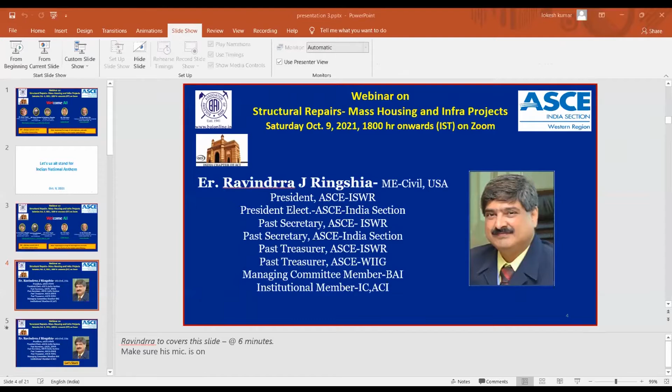So this is the issue, it's not coming on full screen. Theek hai, okay, go to the view option on the top, slideshow ke baaju mein. Okay, not a problem, we'll carry on. Not a problem, let it be. Lokesh, let it be, don't worry. It's an IT problem, not a civil engineering problem.

So, fine, it's my pleasure to welcome again our chief guest, Mr. R.N. Gupta, President BAI, and our today's expert speaker, Dr. Ehsani.

Dr. Ehsani, Centennial Professor Emeritus of Civil Engineering, University of Arizona, USA, and President of QuakeWrap Inc. And Dr. Ilyas, Director Region 10, ASCE from UAE, and Dr. Kamal, Governor Region 10, ASCE from Sri Lanka.

Mr. Deepak from High Speed Rail Corporation, Mr. Rajendra Pawar, Past Secretary WRD Maharashtra, Mr. Tilak Raj Kapoor, Past Secretary Water Resource Department MP, Mr. Carlos from Mexico, Mr. Yashpal Mehta from Delhi Metro Rail Corporation, dignitaries from Water Resource Department from Maharashtra and MP, dignitaries from Sardar Sarovar Narmada Nigam, and dignitaries from Pan India and all over the world, students and my dear friends.

Thank you very much. Thank you, Mr. Shri, and thank you so much. It's great to be with you. Thanks to all of the distinguished guests, and I'm happy to participate in your seminar today. Let me start by sharing my screen. So hopefully everyone can see my screen now. Yes, sir. All right, very good. Well, again, thank you. I know I have a limited time, so let me just jump into the presentation and get going with this.

Okay, so in my talk today, I'll start with a little bit of introduction about FRP and how these materials work from an engineering sense. This is really the result of nearly four decades of my work, so to summarize it in 30 minutes, I hope you can appreciate that I'm not going to be able to cover everything in depth, but I'll give you a flavor of some of the things. I'll basically talk about beams, slabs, and column strengthening, and towards the end, some new products we've developed for marine infrastructure or steel columns, and then sandwich construction.

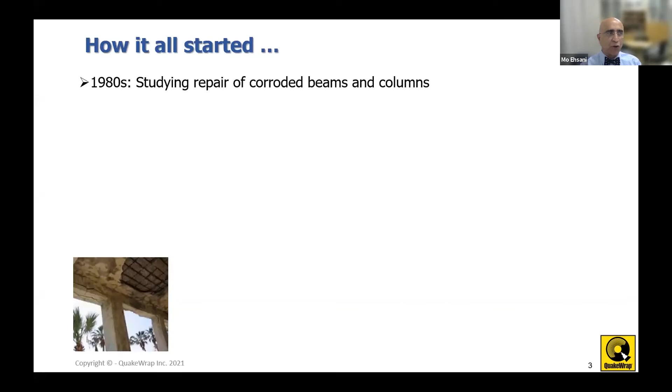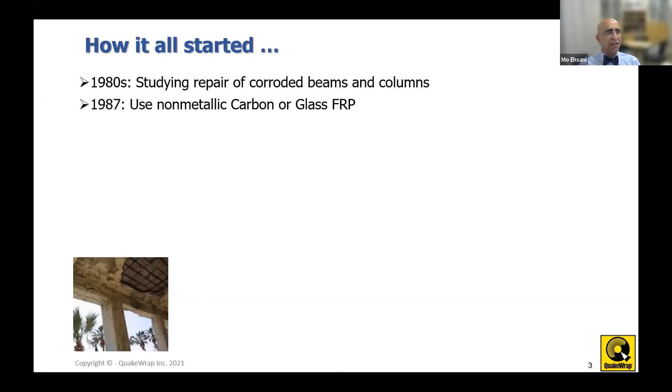So this whole thing really got started in the 80s when I was looking, in the beginning of my career, at some new solutions for infrastructure repair, because as you know, most of the problem is with the corrosion of steel. So we were looking for a non-metallic solution, and that's why we started looking at carbon or glass FRP, and I'll explain these in more detail. But at the time, carbon was being primarily used for military applications, so it was really expensive and didn't make sense for use in the construction industry.

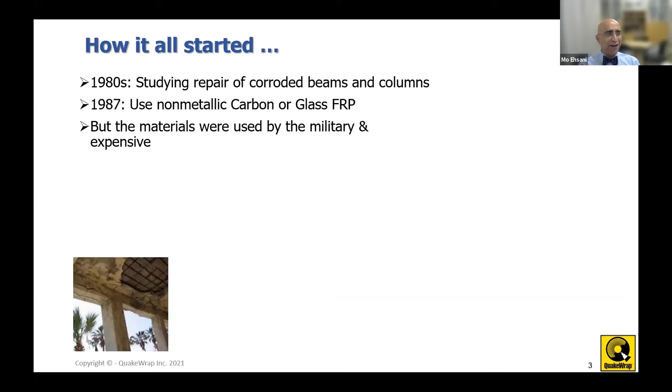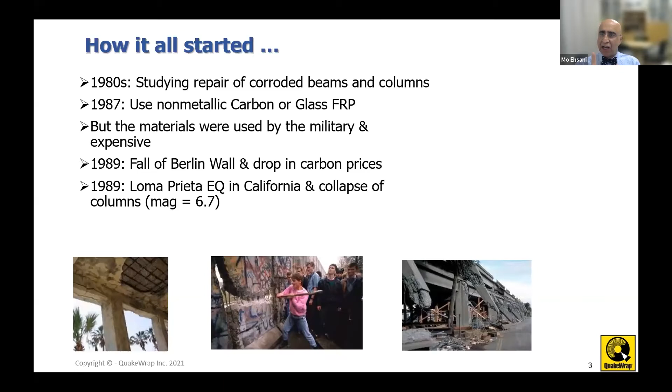But for those of you who are a little more senior, age-wise, you can recall that at the end of the 80s there was the end of the Cold War and the collapse of the Berlin Wall, and as a result the military's need for these materials dropped, and consequently the price went down. About the same time, there was the major 1989 Loma Prieta earthquake in California, where many of the columns in bridges and buildings failed because they had enough longitudinal steel but not enough ties to confine these columns. So everything was kind of falling into place.

And so at that time, we started developing this company, QuakeWrap. In fact, the name QuakeWrap came from that first application, wrapping fibers of carbon around the column to make it earthquake resistant. So that's how we got the beginning, or the start, of our company.

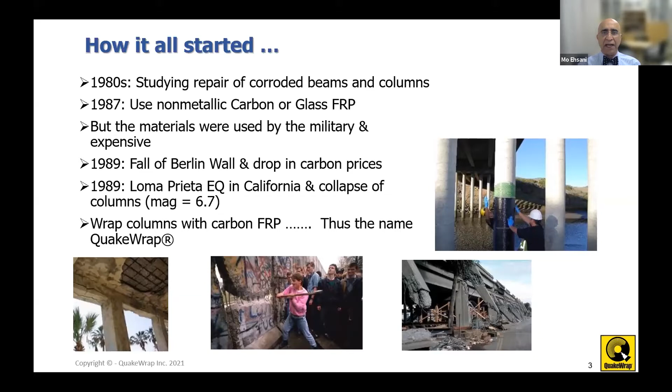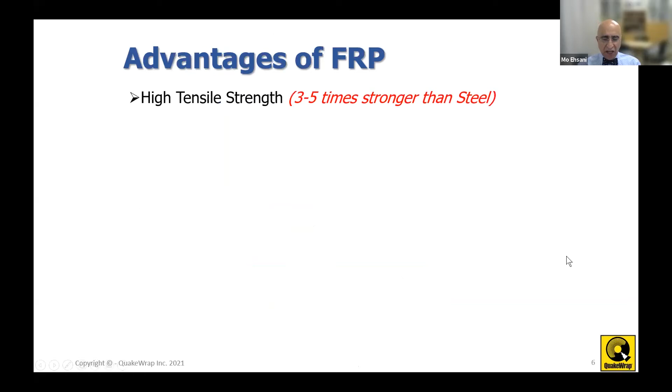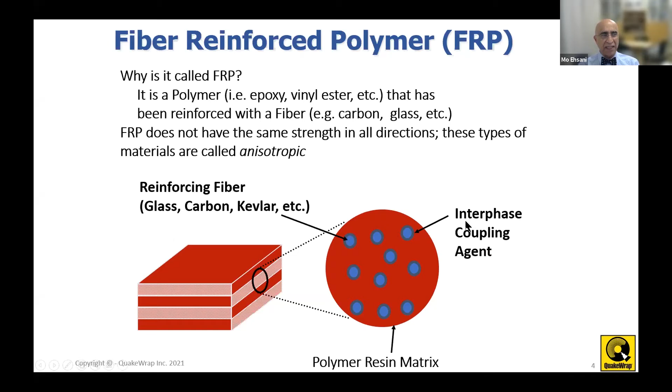Now, one thing that's very different about FRP compared to other materials is that unlike other engineering materials that are isotropic, these FRP products are anisotropic. So their strength comes from the orientation of the fiber. That's really something to keep in mind - it's the fiber that gives the strength, and that can be a very useful attribute of these products.

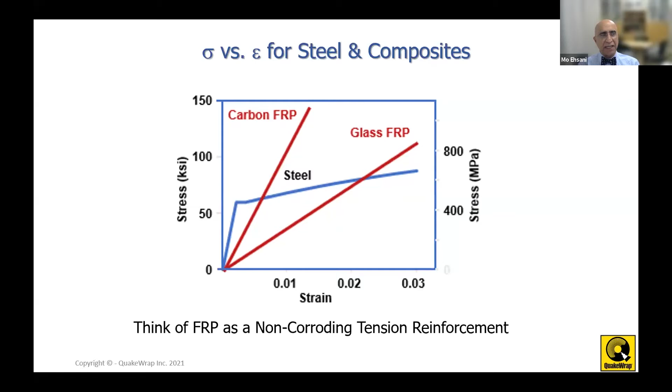In terms of their strength, unlike steel, which we're familiar with, that goes through a yield plateau and maintains that strength, FRP products all act linearly elastic to failure. So here we have carbon FRP or glass FRP, and as you see, both of their breaking strengths are higher than steel, but they work linearly elastic to failure. So that's something to keep in mind. But as I'll show you in some of these applications, really keep in mind these are just like any type of tension reinforcement that you use, except that they don't corrode. That's the main advantage of it.

I'm not sure why - if somebody else is controlling this, I hope they're not. I can control the thing on my own here.

So the advantages are listed here. We have high tensile strength, about 3 to 5 times that of steel, lightweight - if you're strengthening a building, you usually don't need any foundation adjustment. They are, as I said, corrosion resistant, with excellent chemical protection, and they are waterproof, of course. Construction goes really fast, and they are versatile, in that they can be applied to any type of cross section, taking that shape.

These are some of our particular product attributes - they are safe for the environment, so we have no VOC, or volatile organic compounds. They're 100% solid, and our products are also odorless, and we have certification for repair of potable water pipes and tanks. So in general, these FRP solutions offer a low-cost alternative with a good return on investment for many of these projects.

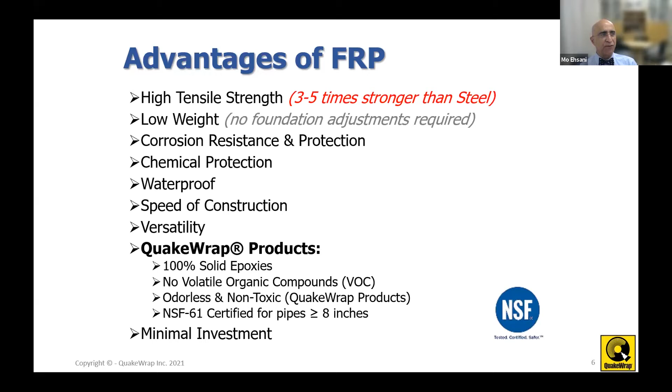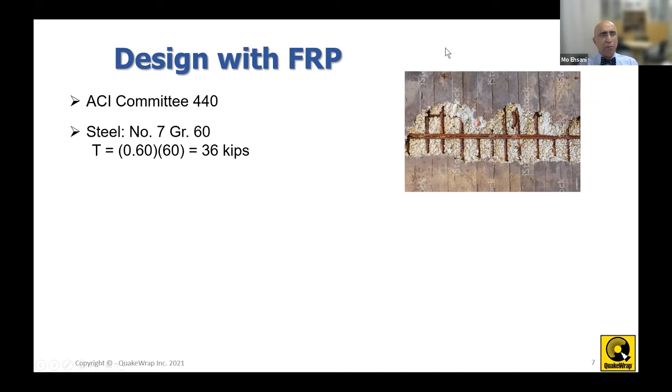So I thought, as an example, if you really want to grasp this concept - of course there have been codes developed recently, the ACI Committee 440 now has documents that help with the design of these - but let's just say you're looking at a typical concrete wall, for example, which has some number 7 rebar. Number 7 is basically about 22 millimeters in diameter, at a certain spacing. And that number 7 rebar has a force of about 36,000 pounds.

And if you put a layer of this carbon fabric on the surface of the same wall, this particular fabric has all of the carbon fibers oriented in the direction of that green arrow. So if you took 1 inch or 25 millimeters of this and tested it, it breaks at about 6,000 pounds every inch.

So really the comparison is that 6 inches of this fabric gives you the same force as one of those reinforcing bars. Basically, if you cover your wall with this layer of carbon fabric, it has the same strength as putting number 7 rebars in your structure.

And as you can appreciate, this is very thin and goes on very easily, so construction is really easy. And then, of course, you have an impervious layer on top of your structure that prevents it from corrosion.

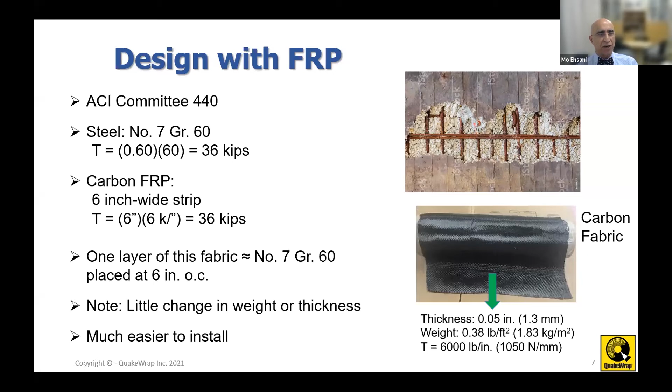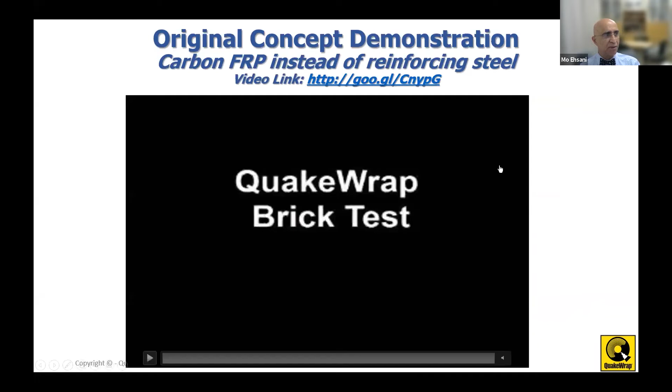I thought this video might give you a good idea of how the original system that we developed works. Here I have a series of bricks put on a table. They are not even connected or bonded together. Let's show this video, and hopefully nobody is touching this so the video will play.

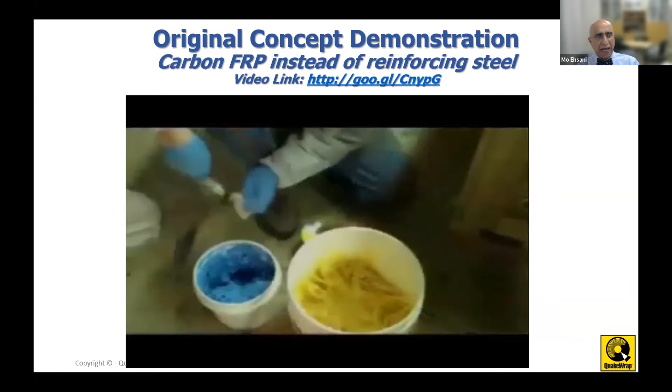So we can take this carbon fabric, which is the reinforcement. You see, you can cut it with scissors easily. Then we mix this epoxy paste material.

I'm not sure why this is doing it. Okay, I guess we won't show you the video. Something is technically going wrong.

But these FRP products are best for tension reinforcement. And again, realize that in concrete structures, shear is also resisted as diagonal tension, so they work with that.

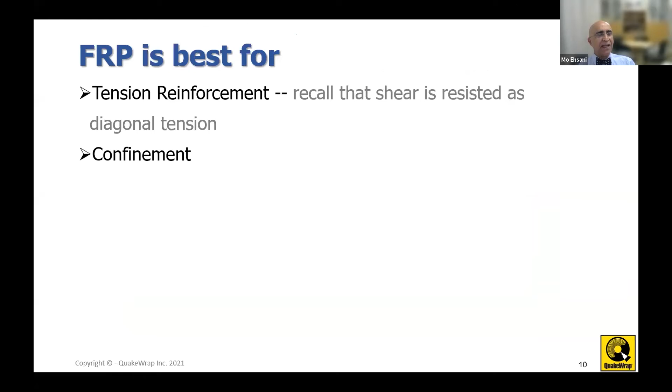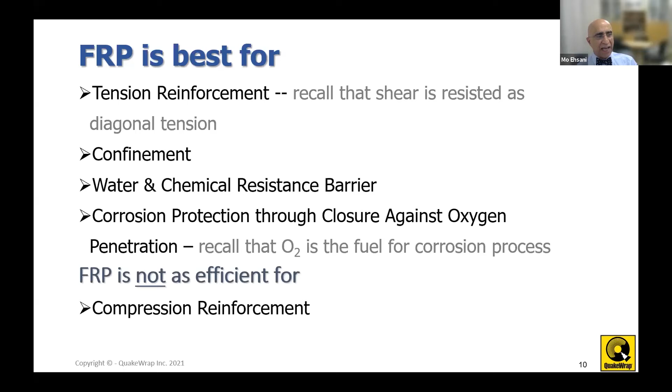They're excellent for confinement, and as a water and chemical resistant barrier. Remember that for corrosion to take place, you need oxygen present. If you wrap your structure with a layer of FRP that doesn't allow oxygen or moisture to penetrate, this would definitely help stop the flow of oxygen and bring the corrosion rate down to very low levels.

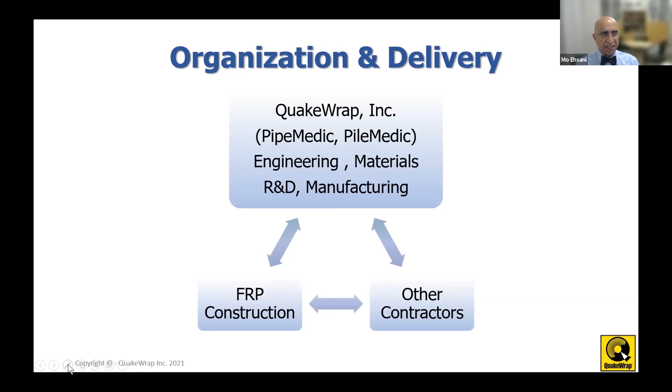And sometimes our company and other contractors team up as a subcontractor arrangement. So there are various ways of delivering these systems.

In this slide, because of the shortage of time, I thought I would at least show you all the different types of applications these materials can be used in, and hopefully I'll get to cover some of them in more detail.

So the first building you see on the upper left was an 8-story building in Miami, Florida, and they wanted to build 2 more floors on top of that. The columns in the lower 8 floors, there were 180 columns, and we strengthened those columns so they could carry the weight of the additional floors.

The pipe that you see here is a penstock for a hydroelectric project in Costa Rica, 1.75 kilometers of a 2.1 meter diameter pipe that was built on site. When they tried to turn it on, they realized there were millions of holes in this pipe and it was leaking. So we fixed that in 3 weeks and received a couple of international awards for that project.

That bridge you see shows that sometimes even construction errors could be a good candidate for these repairs. This was a brand new bridge that was being built in New Mexico.

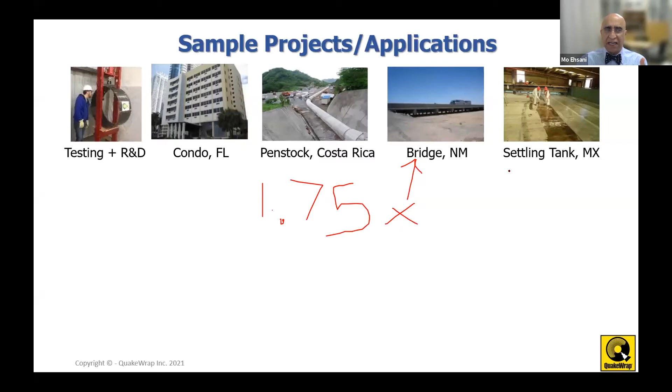The next project is in the mining industry, a settling tank in Mexico where they hold sulfuric acid in these mines. It's a very corrosive environment, and we can strengthen those tanks by lining them. Another example is for the United Nations, a few years ago when they built a new headquarters in Beirut, Lebanon, we provided blast retrofit for that building before they moved in.

Many projects involve historic buildings and preservation. In India, you have a lot of historic buildings with your rich culture, and these solutions are ideal because they can be used without changing the historic nature of those structures. Here you see the Los Angeles County Museum of Natural History. That other 14-story building in the middle was damaged in an earthquake in Alaska, and because of the high cost of repair, it was left abandoned for 20 years. But with these solutions, it was fixed and again received an international award.

We make pipes out of these products in different shapes and sizes. These pipes can be made very close to the job site, which is the main advantage, so you don't have to pay a lot for transporting them. In this project in Australia, our office there is repairing a culvert under a roadway with pipes built in our office in Brisbane.

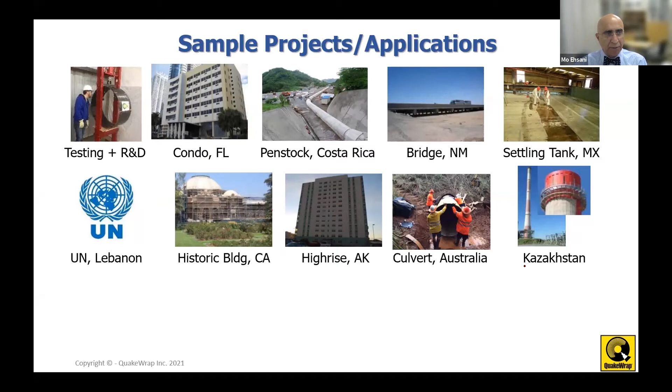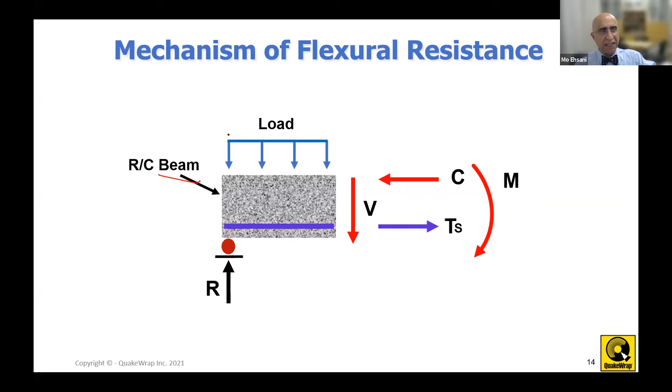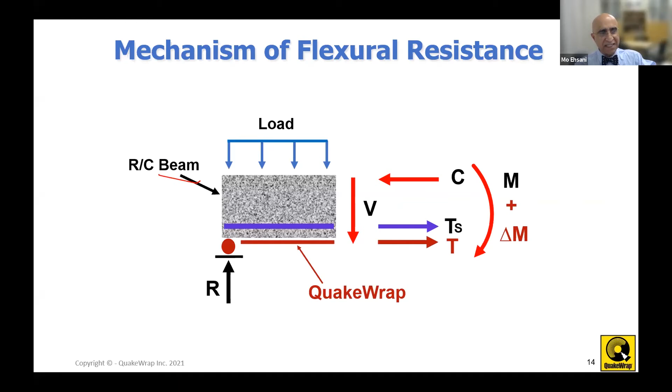Let me look at the beams and the mechanism of it from an engineering point of view. Typically you have some tension in a concrete beam. The tension comes from steel, and the concrete provides compression. You get a moment capacity. If you have lost some of that because of corrosion of steel, by adding these layers of FRP on the bottom of your beam, for example, you get an additional tension force and an increased moment.

Some examples of this: keep in mind that in the flexural direction, these FRP products are anisotropic, so you have to be careful about what orientation the fiber is placed. The fabric you see on the bottom of the beam goes along the span, so the fibers are in the direction of the span. For shear reinforcement, we have the fabrics or fibers going in the vertical direction.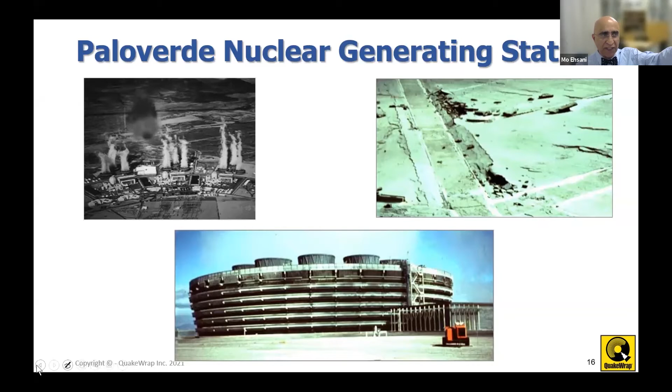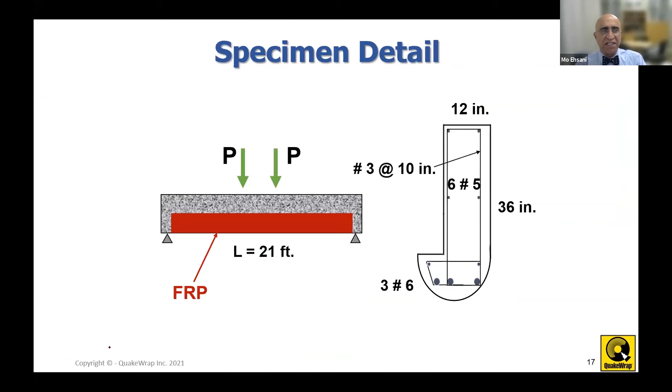Here was a case we had done more than 20, 25 years ago. We were doing this for a nuclear power plant where, because of corrosion on the roof of the structure, the beams were very severely corroded. So they sent some of these beams for us to evaluate, and as you can see, the bottom of these beams was curved, so it was difficult to apply steel to them to strengthen them.

So here we are putting some of that glass fabric saturated with epoxy. As you can see, it can be put on the bottom of these beams and it takes the shape of the curve. Then we can also provide the shear reinforcement, and as you see, it conforms to the shape fairly easily.

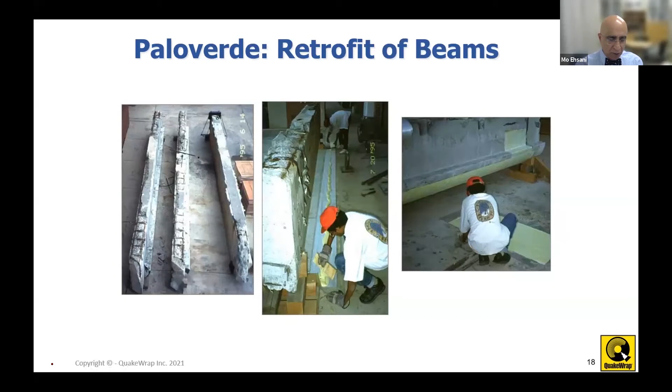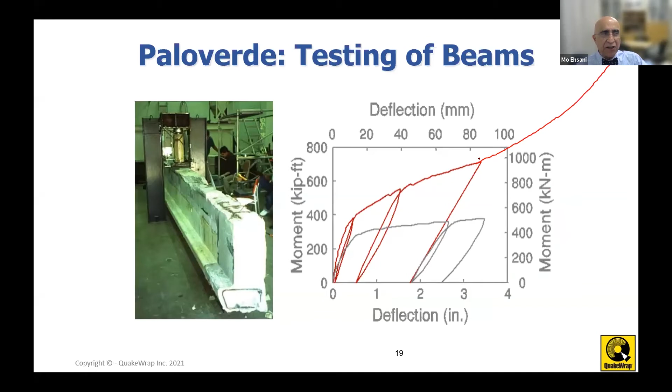Then we tested one of these, and you can see how the gray graph shows the unretrofitted, or original, construction, while the red one shows it after strengthening. As you can notice, this is so much stronger than the conventional, unretrofitted beam. We had increased the strength of this beam by about 2 times with this relatively fast system.

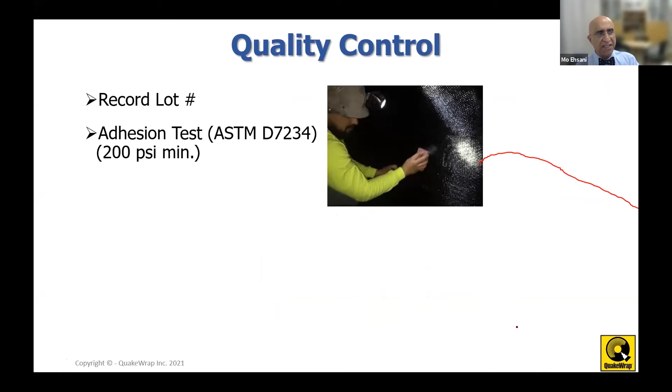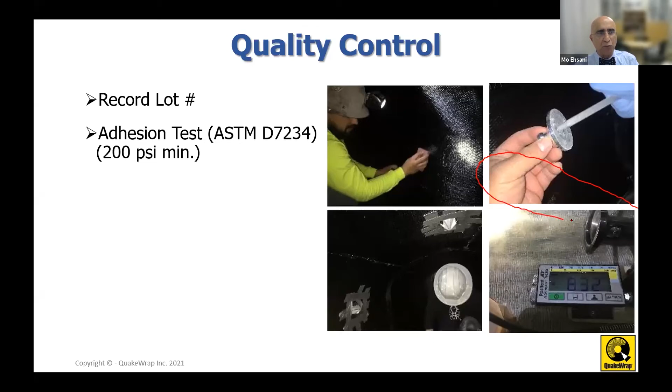In these projects, you also have to have quality control. One thing is you can keep track of the lot number for all the products being used. Another is the adhesion test - according to the ACI code, we must have a minimum 200 PSI adhesion. This is done by gluing or bonding pucks to the surface of the structure, then coring around them and pulling. Oftentimes we get a lot more than 200 PSI, but that's the minimum requirement. We also make witness panels of these samples, just like in concrete where you take cylinders for testing. We make these flat panels and test them later in the laboratory for tensile strength.

Our products are also approved by...

Can you please remove this fellow who's making these changes? Can you take him out from the meeting? Yes, please, I would appreciate it. Madhu, can you do that immediately? Yes, thank you, because this is... thank you.

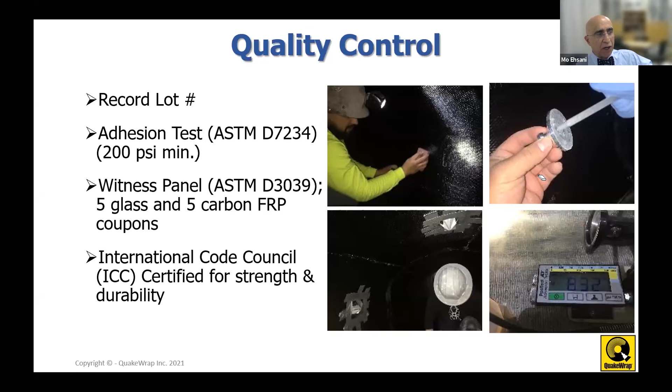In the US, for example, the International Code Council (ICC) certifies a handful of companies, including us, whose products have been tested, approved, and certified for such applications.

I really want to caution you here - I've heard that in some designs in India, for some projects, engineers are saying to just use carbon fabric and epoxy. You have to be very careful - this is a recipe for disaster. The systems I'm showing you here have been tested for decades and proven to work together well. You must make sure of that - again, this gentleman, whoever it is, is just ruining this show, and I don't know why.

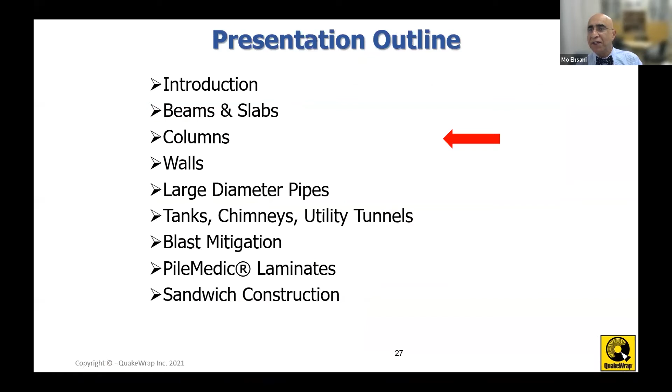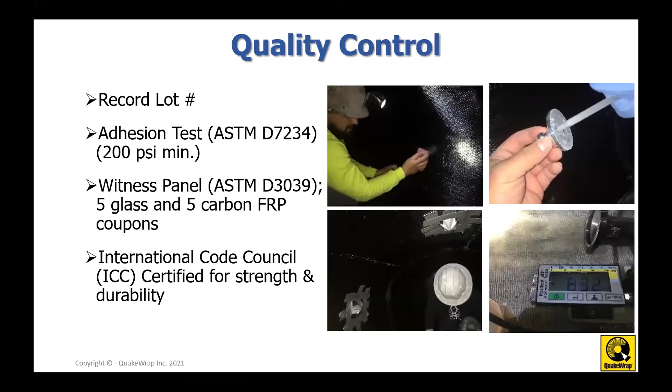Mr. Ravindra, could you ask them please not to touch anything so I can continue? We are figuring out who's doing that and we'll lock him out. What is his name? I don't know, someone is doing something. Uska naam kya hai? What is his name? Annotations have been stopped - I don't know who's doing that. Can you figure it out, please?

Madhu, you take over full charge. Remove all admin rights and keep them with you only. Thank you, yes. No, please, Mr. Mo, please continue. Mr. Mo, please continue.

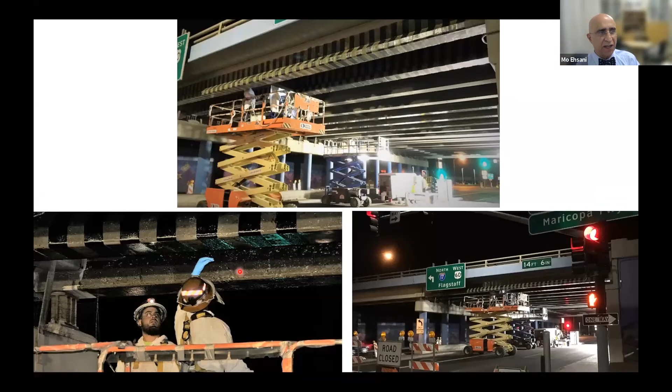Here is an application to some girders of a bridge where a truck oftentimes hits and damages them. As you can see, these repairs can be done easily at nighttime when traffic is low, accomplished in maybe 2 or 3 nights. Like here in a project in Phoenix, we can repair 2 or 3 girders in 2 or 3 nights without disruption of traffic. We can strengthen them for shear or for flexure this way.

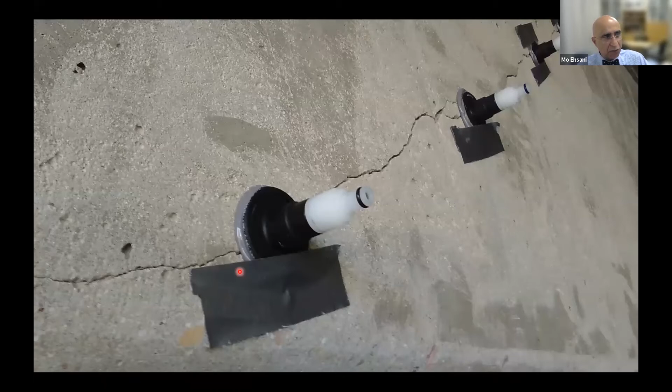Of course, if the concrete is cracked, it may require some crack injection. Here, for example, we first did the crack injection in the concrete, and realizing that crack was formed because of lack of steel, following the crack injection we applied the carbon fabric to provide additional strength for those weak beams.

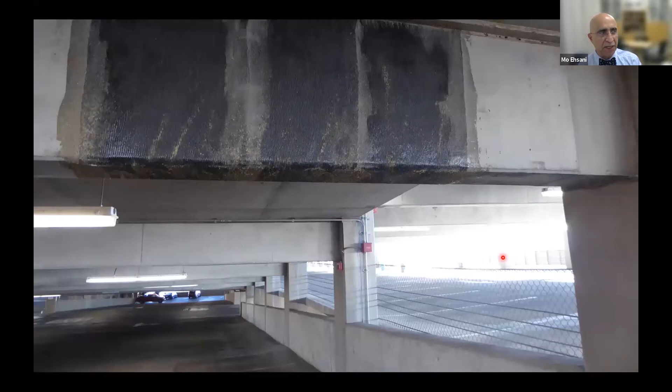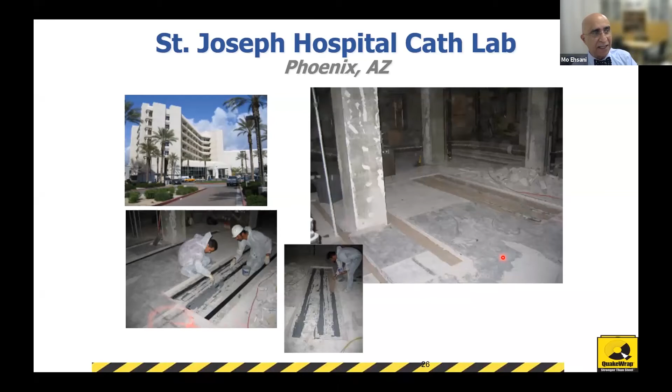I wanted to say a little bit about these columns. The issue with a lot of these columns is that, especially in seismic regions, the older codes required a tie at a spacing of 300 millimeters along the height of the column.

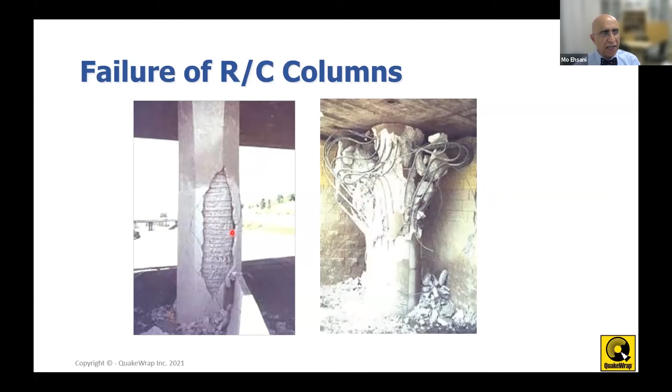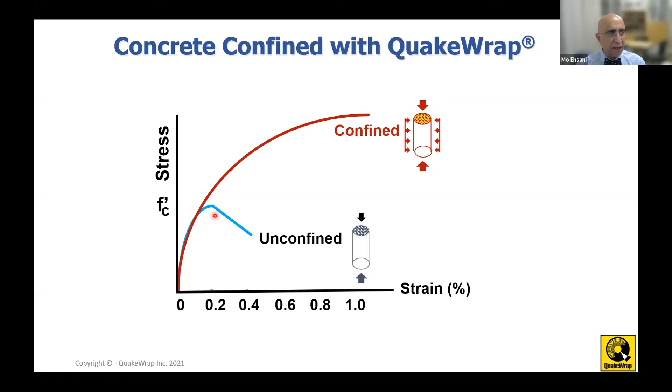So the solution is to provide confinement around the column. When you provide that confinement, not only do you increase the strength of the concrete, but you also improve its ductility. Here, for example, you go to about 1% failure strain, whereas unconfined concrete has a much smaller failure strain.

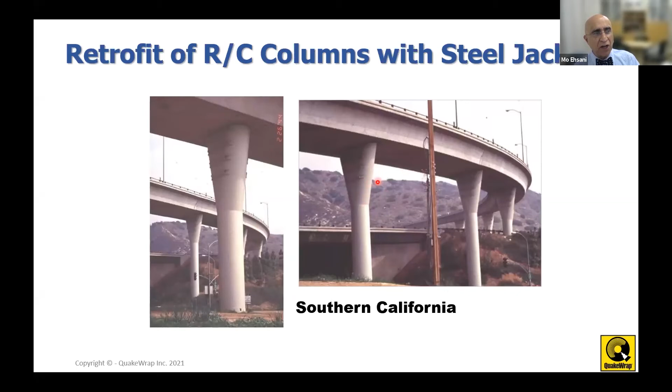In places like California, they have been using steel jackets to provide that confinement, but these are very time consuming and heavy to handle on site. If you're doing the same thing with composite materials, it's much easier. So here it shows you how with those composite materials we can apply these.

I want to draw your attention that if you have a very badly corroded system like shown here, you first have to repair that concrete, make it smooth, and then apply the fabric. This is one of my latest inventions, sidesteps this whole issue. That's one of the advantages of the PileMedic system, you can directly apply it without spending time to repair the surface of the concrete first.

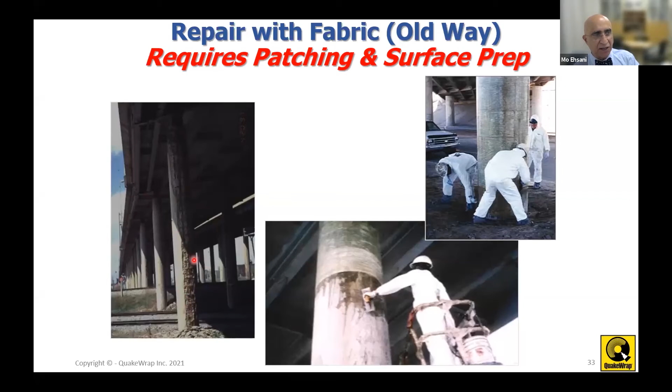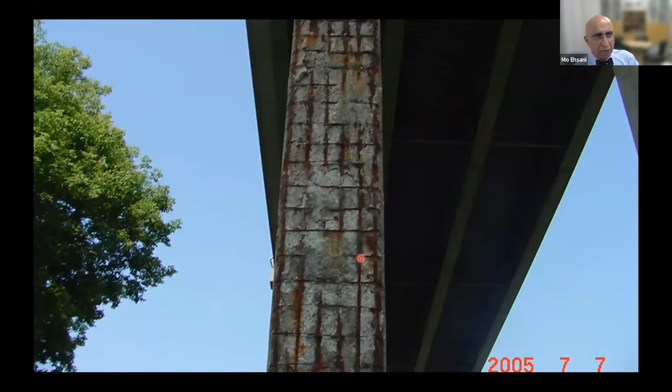Here are some other applications, applied like seismic upgrade of bridges in California, where they are wrapped around those columns. Another bridge case where there is bad corrosion, we fix it, bring it to the original shape, and then the fabric is wrapped around in bands of about 1.2 meters, wrapped continuously around.

Keep in mind that not only are we strengthening this, but now this entire column is encased in an impervious shell, so the service life of it is tremendously enhanced. As I mentioned, one of the things we have developed is this PileMedic, which are thin laminates that we manufacture.

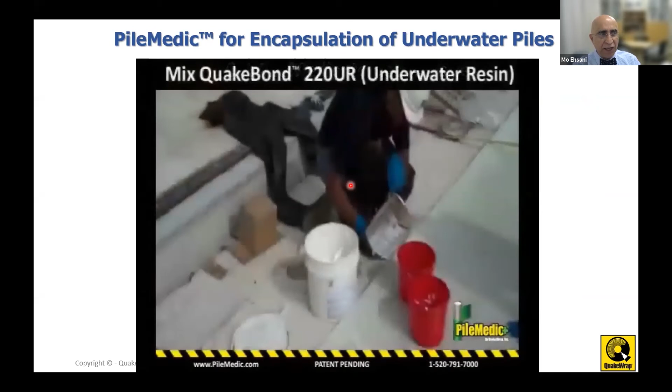They make a lot of these column repairs much easier. I hope this video shows how we can repair columns in water, for example, for ports and piers. The laminate is cut in the field to the length you need. This particular epoxy that is applied to it cures underwater, so you don't need any coffer dams.

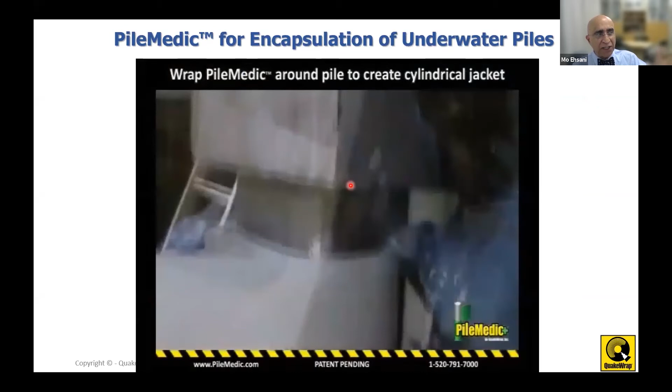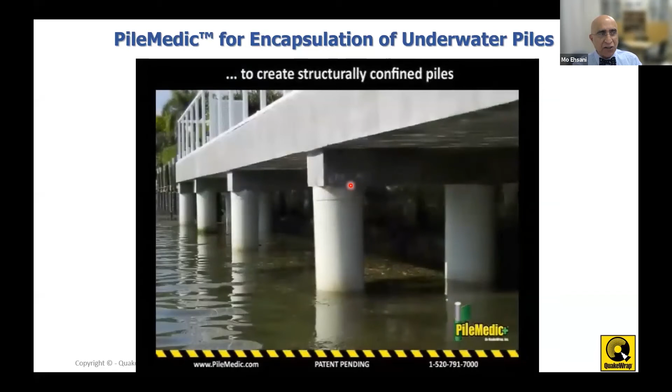You see here, they wrap that around the column, but the surface of the column could be rough, it doesn't need to be finished before. We create this jacket around the column, and then the annular space is filled with grout or concrete. So very quickly, these columns are fixed.

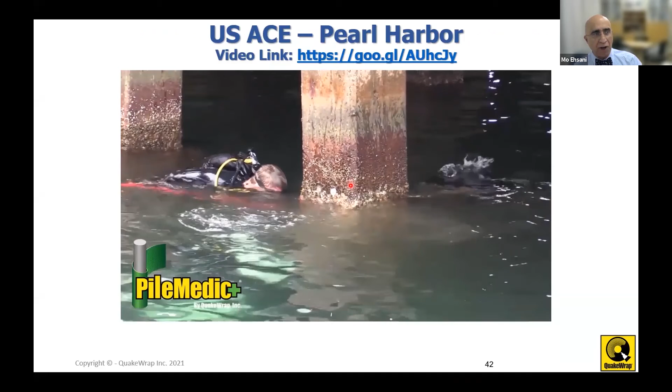This is a product that has been tested by the US Army Corps of Engineers, and it's now the only product that the military uses worldwide. Here are the Navy and military personnel developing and training in Hawaii.

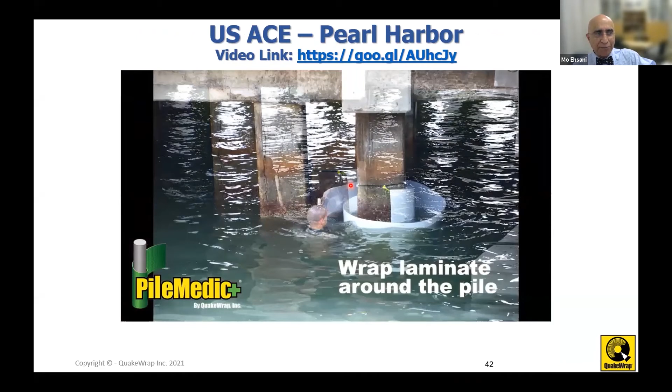You see these sheets are taken into the water, wrapped around the pile, and they were testing different water conditions, visibility, wind, and speed of water, as a one-size-fits-all pile repair system. Repairs using PileMedic were also assessed in a variety of conditions, including darkness, rain, high winds, and rough waters.

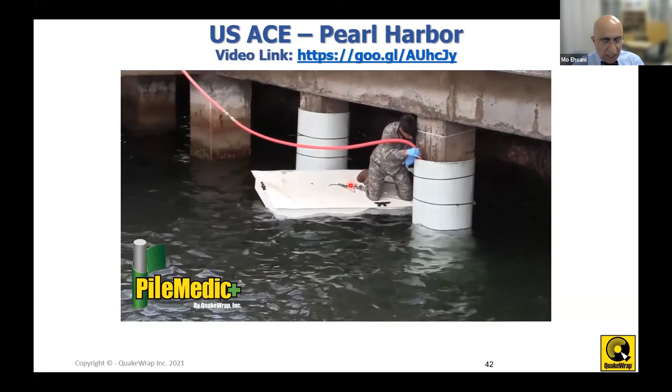Visit PileMedic.com. These things were later used in Pearl Harbor actually to repair about 90 piles, and now we sell these kits to the U.S. military. They are doing some projects right now in Ukraine using these as we speak.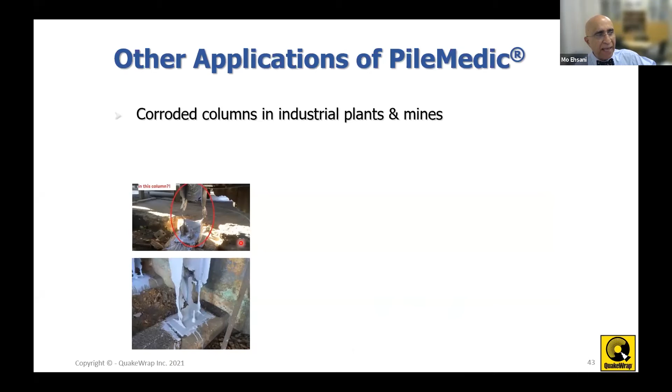This technique or product that we have developed also, for the first time, allows you to use FRP to repair steel columns. Because if you have a steel column that is so badly deteriorated, there is only paint holding this steel column together in a mine, and with these, of course, you cannot apply the FRP to the surface of these.

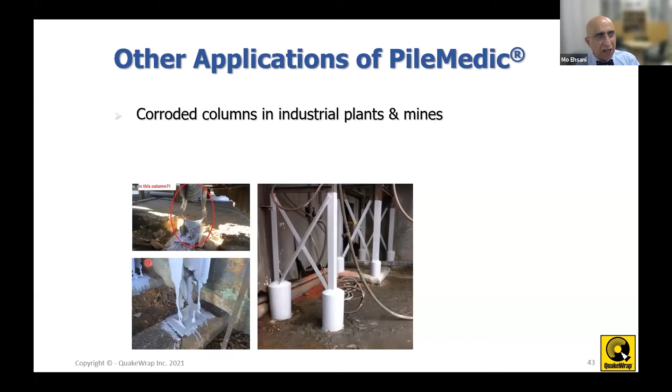But with this new system, we can create a shell around that which can be filled with concrete. We can insert some reinforcing bars if needed. So these types of failures can be fixed without taking the structure out of service. We have also used these on over 100 cell phone towers strengthened in places like San Francisco and Los Angeles to add additional capacity for the cell phone companies to put more equipment on them.

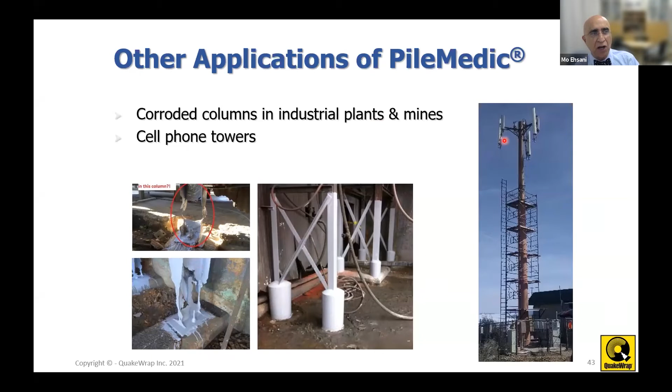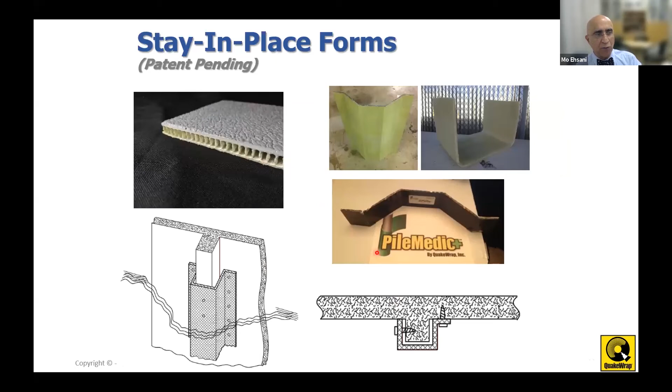The last thing I wanted to show is how we use this I-beam concept with sandwich construction. Carbon FRP is not inexpensive, so if you put many layers on top of each other, it becomes pretty pricey. With this system, if you put something in between to separate the layers, you get an I-beam effect. Here we have, for example, two layers of carbon put together, but if I spread them by putting some less costly material in between, I can get much higher stiffness with relatively little additional cost. So we use this for some products, making rigid elements for repair of seawalls, ports, piers, and under bridges.

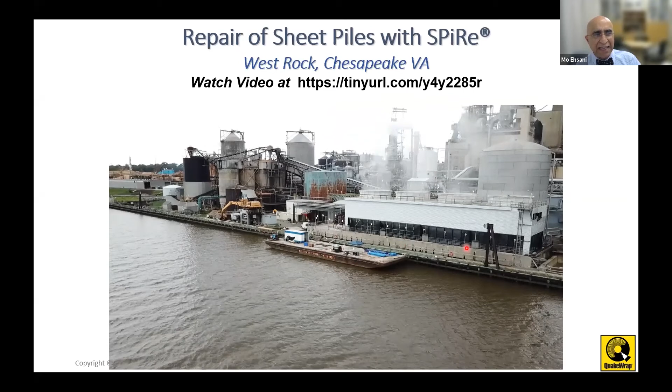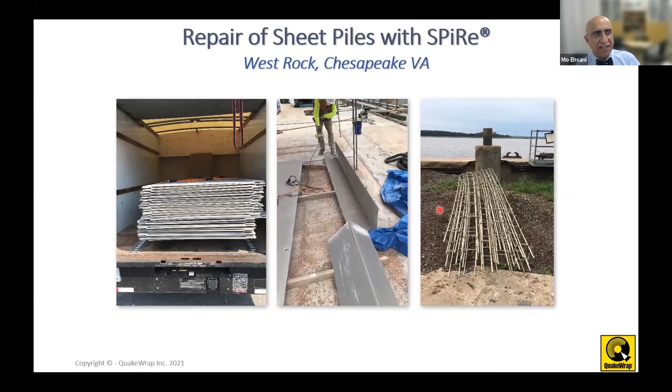This is one such application. In this case, this is a seawall along here which is badly corroded. This plant is a pulp and paper plant, so the soil had some chemicals in it, and they were worried about the chemicals leaching into the water. So we make these panels in our facility, using also some FRP rebar.

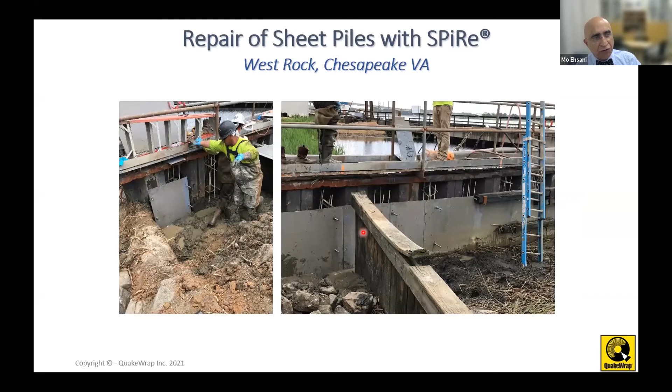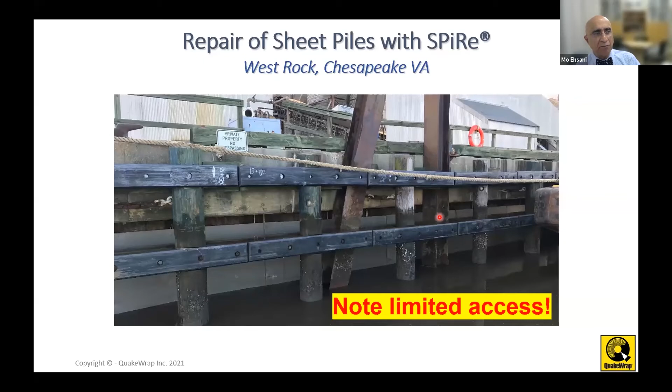Then on the job site, these panels are connected with J-bolts in front of the old deteriorated wall to create a new wall that is impervious and becomes the stay-in-place form. Once this wall is in place, we can fill the annular space behind it with grout. Notice that in such repairs, even with very limited space, these panels are light enough that divers can take them under these fenders and install them. Here you can see them working, putting the panels together, and finally after the grouting operation has been completed.

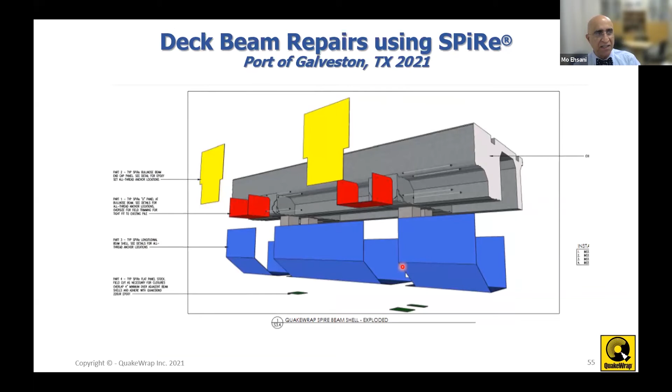I know because of the time limitation, I'm going to stop now, but I wanted to draw your attention that in the beginning of COVID we gave some webinars to an international audience. Those webinars are available on these websites, you can download them. Each is about a little over an hour long, a video you can watch at your own leisure. The first one is about repair of piles and marine infrastructure, seawalls, piles and piers. This is the address for that website. The other one is for the repair of all kinds of pipes, which I didn't get to cover much today. This webinar talks about all of our various solutions for pipes.

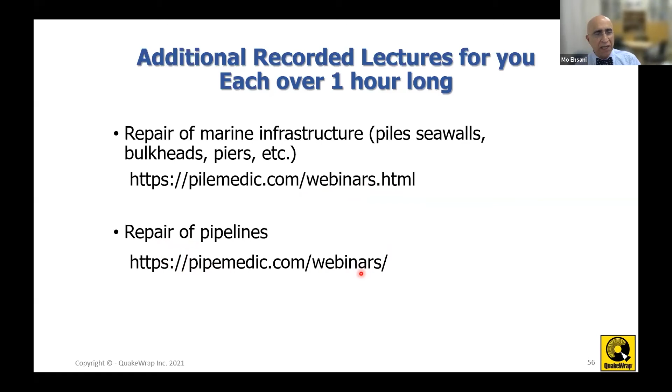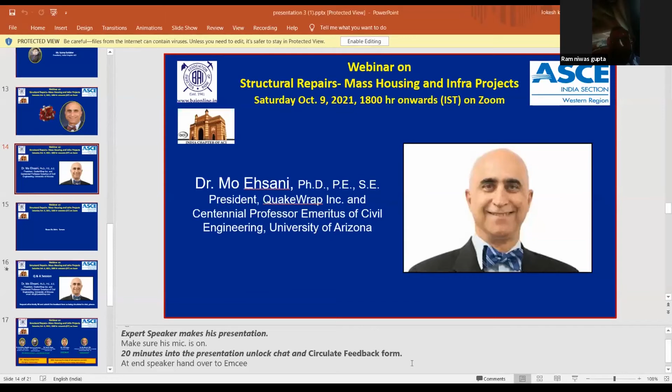Sir, what will be the... Sir, I want one question. I want one question. Sir, now we'll be having a question and answer session now, sir. Yeah, the President of Builders Association of India wants to ask a question. Now I request Professor Ravi Sinha, who is the Dean from IIT Mumbai and a professor in the Civil Engineering Department, and Dr. Rajiv Gupta, who is also from Civil Engineering from BITS Pilani, to take over for the question and answer session. Okay, great. Mr. Rajiv Gupta, you can unmute yourself, you are the co-host. Mr. Ravi Sinha, I think he is not there. Mr. Ravi Sinha, sir?

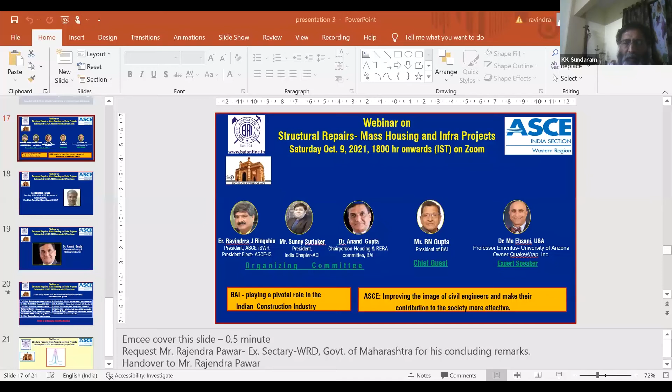Yes, I have a question, if I may. I'm Professor Dr. Sundaram. My question specifically addresses, you have addressed corrosion resistance with the help of your fabric. I want to know if marine creatures and microorganisms will damage the covering you are putting. I want to know if the fabric has been treated for barnacle resistance, specifically for marine objects, and if it can also go into other types of structures. What care have you taken to make sure microorganisms don't deteriorate the structure?

We have not really looked at that aspect of microorganisms, it will happen over a period of time. But for typical corrosion, we have looked at it. So there exists scope for research in that area then? Oh, absolutely, there is a lot of research. If anybody is interested, contact me and I will give you a long list of projects to work on.

Yes, a few more questions are coming up, people are showing a lot of interest. I am integrating a few questions: are they monolithic with concrete? What is the cost? And where is your office in India? Our office in India, if you go to QuakeWrap.com and look at the contact page, you will get full information, email and phone number about our offices in India, Australia, and the US. I refer you to that.

These materials, when we bond them using the fabric, if you use the right type of adhesive like what we have done, then they do behave monolithically with the concrete once bonded. I want to emphasize that what type of epoxy you use and whether it has been tested to show it works with that system is very critical. But given the right products, yes, they do work monolithically with the concrete structure.